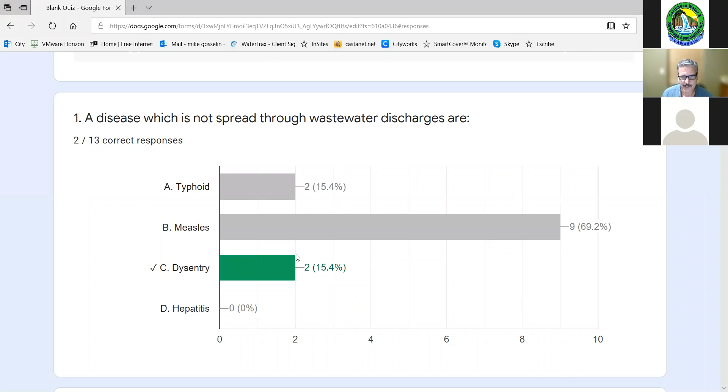Okay. So the first question. This is the one with the typo error, and everybody that picked B, measles, was actually correct. Any comments on that one? And it'd be a little easier for me this morning if you can chime in with your microphones, so I don't have to flip back and forth trying to make sure I didn't miss any chats. So if possible, if you have a question, if you could chime in with your mic, that'd be great. If not, I'll try and flip back and forth.

The second question, everybody got that right. The chemical formula for water. So great job on that one. Number 3, which is not a source of wastewater. And remember, when you do the exams, you gotta watch out for that word not. It does change the whole context of the question. So transpiration is the water movement through a plant. So that's the correct answer.

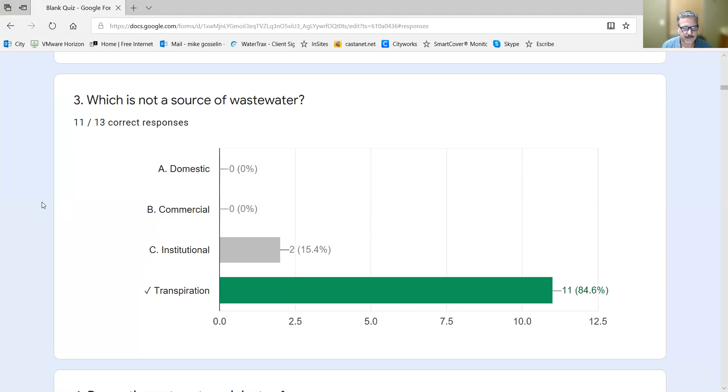Domestic is from a house, commercial is from like a laundry facility or something like that, and institutional is maybe from a correctional institution, but those are all sources of water, and transpiration is not. Like I said, if I'm going to go through and explain some of these, I'm going to need you to chime in if you have any questions or need some more clarification. Okay. Number 4, everybody got that correct, so good job.

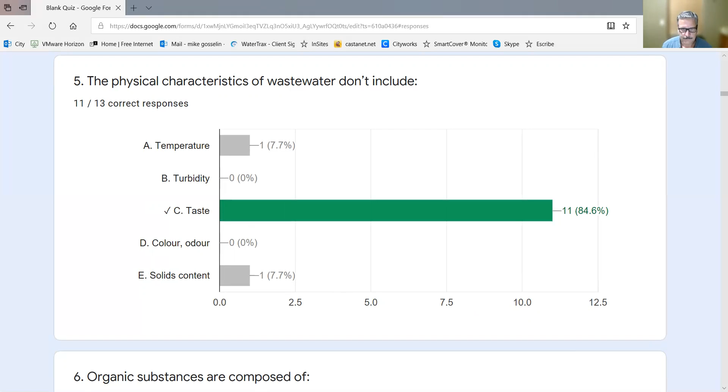Number 5, the physical characteristics of wastewater don't include, the correct answer there is taste. So remember, anything physical, so turbidity, you can see, temperature, you can feel, color, you can see, and solids obviously as well. So taste is something that's not considered a physical characteristic, and you shouldn't be tasting that anyhow. Organic substances are composed of, everybody got that correct, so that's awesome.

Phosphorus is a blank when released to the effluent, so that's a nutrient. So phosphorus and nitrogen are like things that you might add to your garden or your grass if you want it to grow, because it's a nutrient source. Wouldn't be classified as an accelerant. It accelerates what's happening because it is a nutrient, but it's not an accelerant. It's definitely not a retardant.

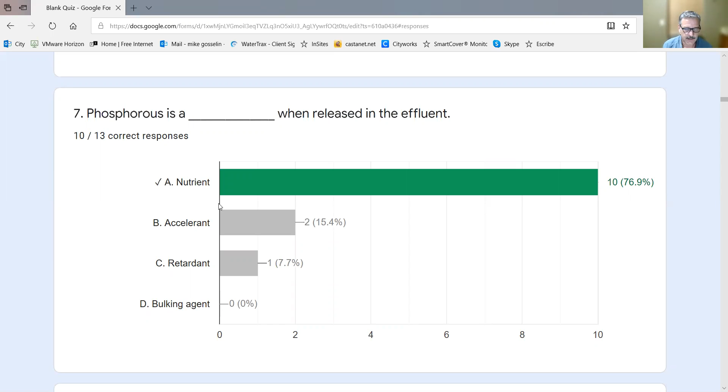So just try and remember that, try and put some of the things in context when you're writing them, or when you're reading them, is like, what else could you use phosphorus for? And like you said, a garden or a lawn, because it's a nutrient. Okay.

Channel 3 meters wide, has flow to a depth of 0.5 meter. What's the daily flow in meters cubed per day through a channel? Velocity is 1 meter per second. So it gives you the calculation there. So its rate of flow is width times depth times velocity. The only other thing that you need to remember is the velocity is 1 meter per second in this question.

So you have to multiply 3 by 0.5 by 1, and then you need to take seconds into a daily flow. So multiply by 60 seconds a minute times 60 minutes an hour times 24 hours in a day. Questions on that one? I'll pause a little longer on some of the math ones. So. Okay.

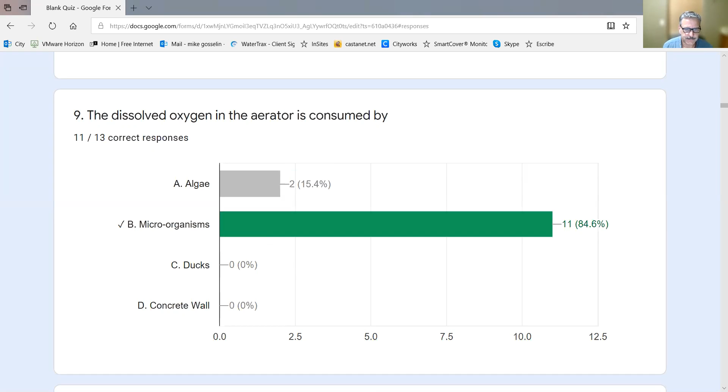Dissolved oxygen in the aerator is consumed by. Now, I could see where a person read this question really quickly, but the majority of people got this 100% correct. So it's microorganisms that need the DO to survive. Algae would consume oxygen, but that's not what the question is asking. So the word aerator, it could have been aeration tank rather than aerator, but it definitely doesn't say anything about lagoons. So algae would not be right in this answer. It had to be microorganisms. 10, the job hazards, everybody got that correct.

I'm going to go through the math on my handy dandy iPhone because we all have calculators. Keep in mind that they won't let you use your iPhone as a calculator in the exam. You're going to need an actual calculator.

So this is a cylindrical tank. So it's 0.785 times diameter squared, 3 times 3, times the height, which is 70.65 cubic meters, and there's 1,000 liters in a cubic meter. So the right answer is 70,686. I come up with 650, but it's 686.

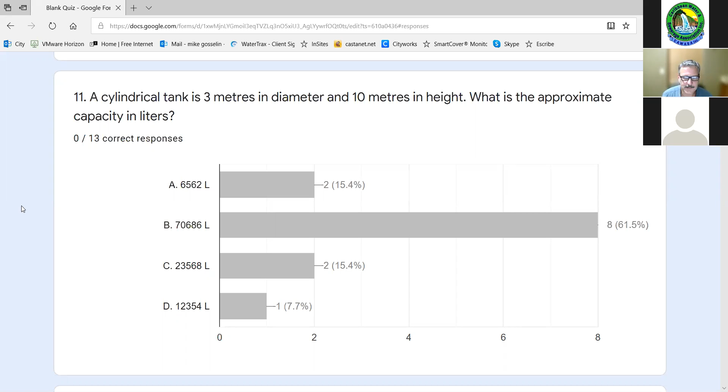pH being acidic, just remember that lower than 7 would be acidic, and higher than 7 is basic. Okay.

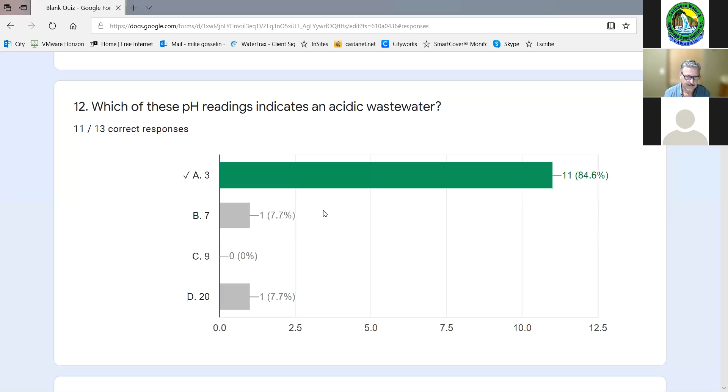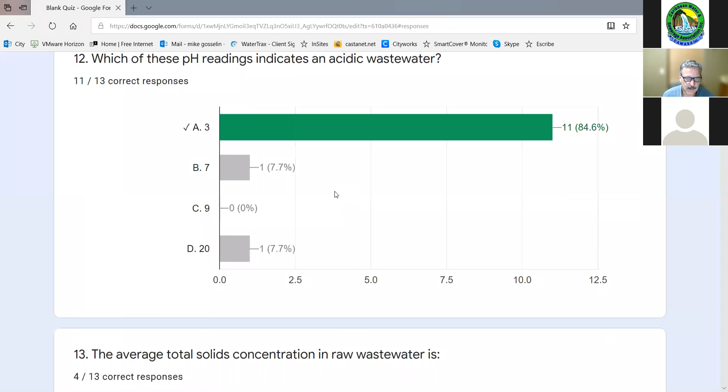These are tough questions. You've got to remember from our... I'm trying to remember off the top of my head. I think it was when we... Sorry, my screen moved there. We talked about the average concentration of wastewater, and 200 is right around the number for raw wastewater. Remember to really read the questions. I'm not quite sure why my screen's moving so much, but really read the question, and it's asking for raw wastewater, not mixed liquor or something like that. So you're going to have to commit that one to memory.

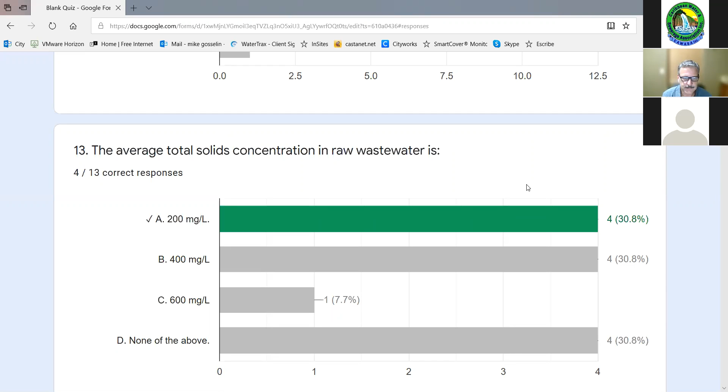Before you go, question. Mm-hmm. When I went back and checked the notes, I don't remember seeing it being 200, because 200 was the suspended solids. If I could pull back the PowerPoint. This is one I had to query, because when I checked the PowerPoints, it said that 450 would have been the total concentration. So for raw sewage, the average total.

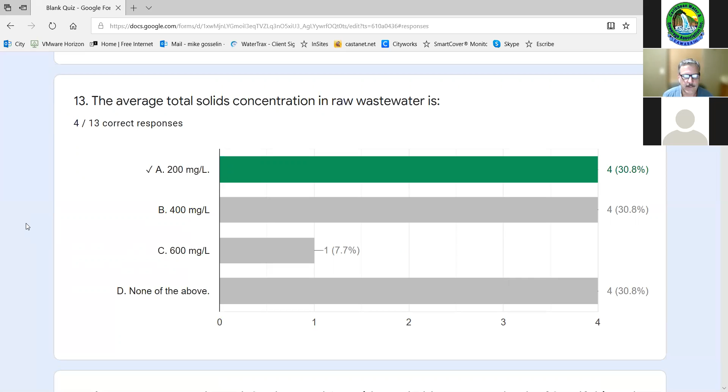I think it's somewhere in the notes, and I don't remember the exact range. It was in a table. I can see if I can pull out the PowerPoint and get back to you. Okay. All right. Well, while you're looking for that, I'm going to carry on. Okay.

Again, don't focus all your time on the math. If you have a problem with a math question or you're curious, just pass it and go back to it in the exam, because there's only a few of those, and it's better to get 90% on the exam and spend less time on the math.

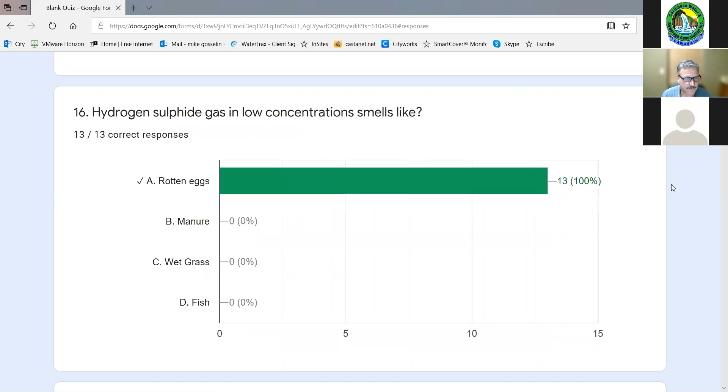16, everybody got that correct. It's awesome. So preliminary treatment, just remember the schematics of our plants. Preliminary treatment is screening, grit removal, comminution; that's everything basically before it's hitting maybe your raw pumps or your primary tank. So that's all classified as preliminary at the beginning of the plant.

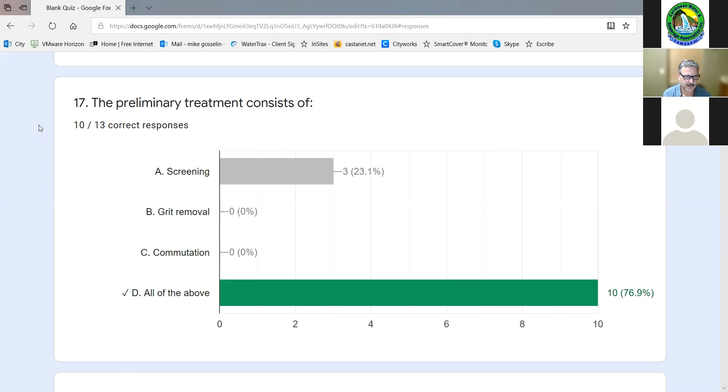Another way you can think about questions like this is, if you're dealing with lift station stuff, what might be outside of a plant, right? Or what's removed from the wastewater flow before it affects the plant. So definitely screenings, grit removal, and comminution would be considered in that.

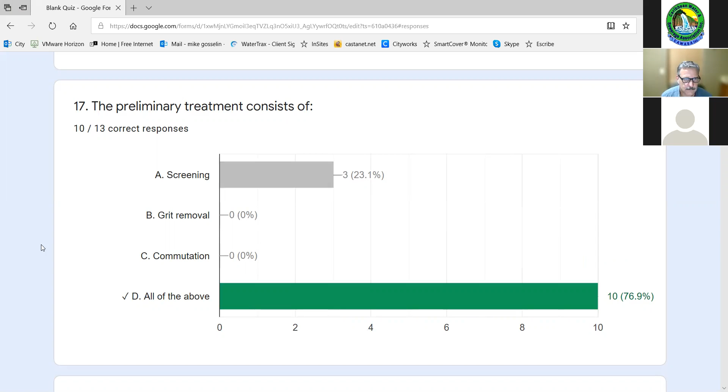Hi, excuse me, Mike. Yeah. All right, I found the PowerPoint slide. It said the solids typically present in a normal medium strength raw wastewater can be broken down like this. So organic suspended is 200, dissolved is 100, which gives you a total of 300. The inorganic suspended would be 50. The inorganic dissolved will be 100, and that total will be 150. So the overall total would have been 450. I remember reading this in the notes, so that's why I said none of the above.

So I don't have the slide in front of me. Can you just read off those numbers again? Okay, 1 second. I'm gonna stand close to the slide. All right. The organic suspended solids were 200. The organic dissolved would be 100, giving a total of 300. And then the inorganic suspended would be 50, and the dissolved would have been 100, giving a total of 150. So 300 and 150 is 450.

So in these types of questions, I totally agree with you. I understand what you're putting on the slide. This question would have probably been better worded if it was organic solids. Questions like this, better off to assume that they're talking about organics rather than total solids, which could include inorganics. That's about the best clarification I can give you. So I totally understand where you're coming from.

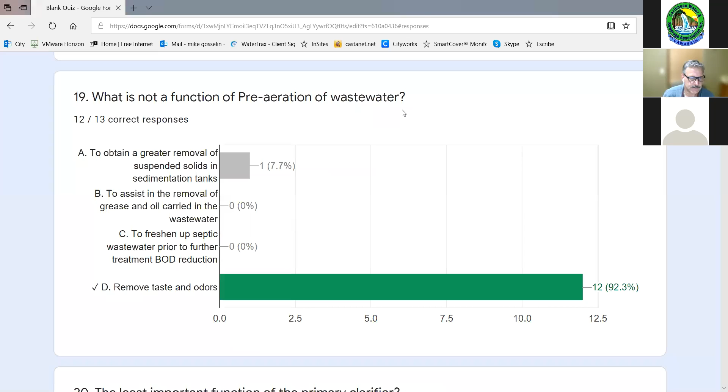Pretty much everybody got this right, which is not a function of a pre-aeration tank. Remove taste and odors is 100% correct. You're going to run across questions like this, and they will be on the exam. I really don't like these questions. You know, what's the least important function of a primary clarifier? But keep the wastewater fresh is not what the primary clarifier is designed for. You're removing sludge off the bottom, scum off the top. Okay.

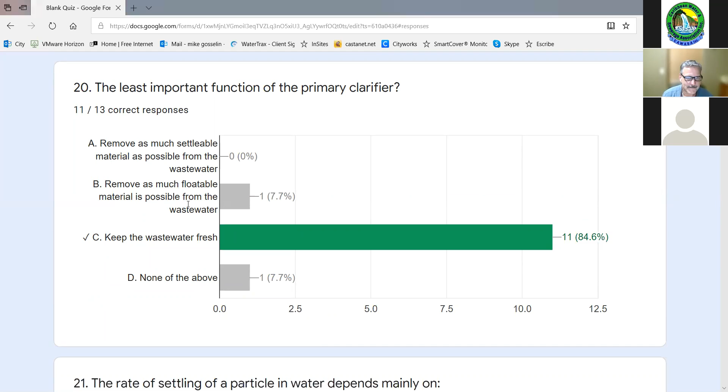The rate of settling of a particulate in water mainly depends on the size and the shape of the particle. I think we covered that quite a bit. Specific gravity, temperature of the wastewater, flow through the tank, all have an impact. But if you remember from our slide, when the question is depends mainly on, and the keyword there is mainly, it's the shape and size of the particle.

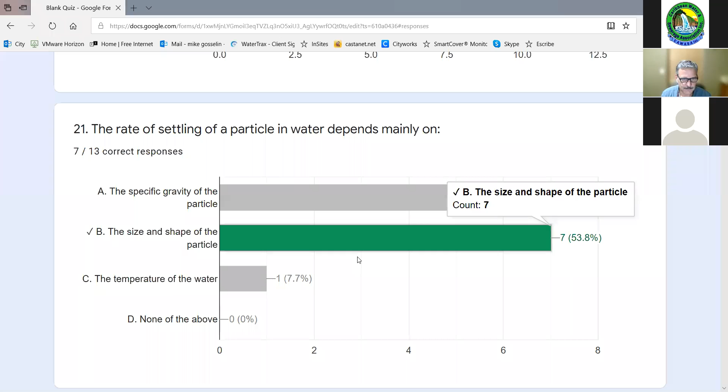Formula expressed for detention time in a vessel: volume divided by the flow rate through the vessel. That's 100% correct. For those that picked answer B, you wouldn't want to flip that calculation around, right? The volume's got to be on top and flow rate on the bottom. Okay. I think we went through some detention time calculations in that PowerPoint as well.

Anaerobic digestion uses two groups of microorganisms, and they're classed as acid formers and methane formers. That's correct. Answer A, types of bacteria. When we talked about digestion, we talked about aerobic and anaerobic digestion, right? Using different temperatures, different bacteria, but it's definitely the acid formers and methane formers for anaerobic digestion. Okay.

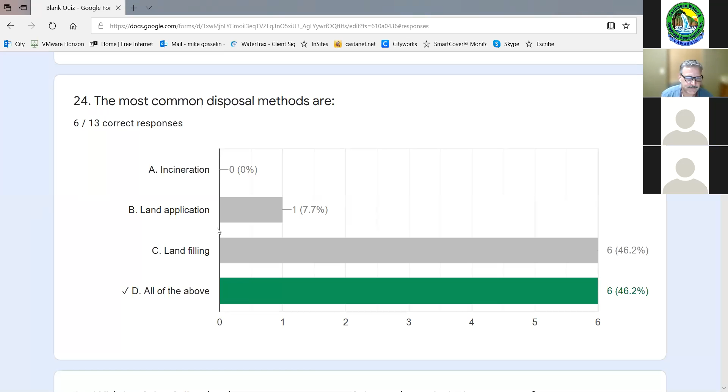Definitely, yeah, I can see where you go. The most common, and you'd be picking landfilling or land application possibly, but they're looking for multiple answers there with methods. It's really good to figure out that kind of part of the question, and how to get closer to your answer. And they're not trick questions, it's just the way they're worded.

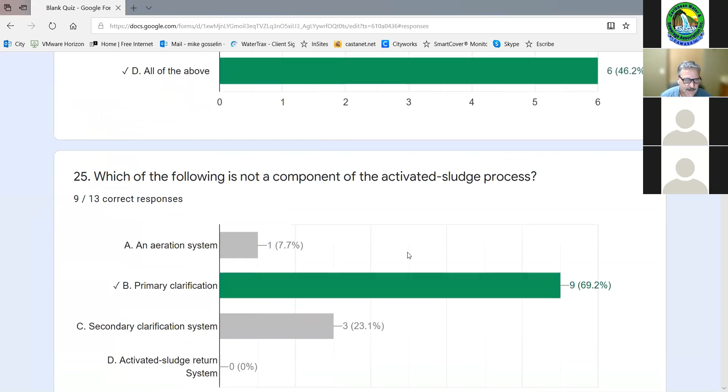Which of the following is not a component of activated sludge. Most everybody got that correct. For those that didn't, just remember that when we break down our systems and the schematics that were shown, you have your preliminary treatment, then your primary treatment, your secondary treatment. And in secondary treatment, you've got aeration system, secondary clarifiers, and the return system is part of that secondary clarification system. So the only answer you're left with is primary.

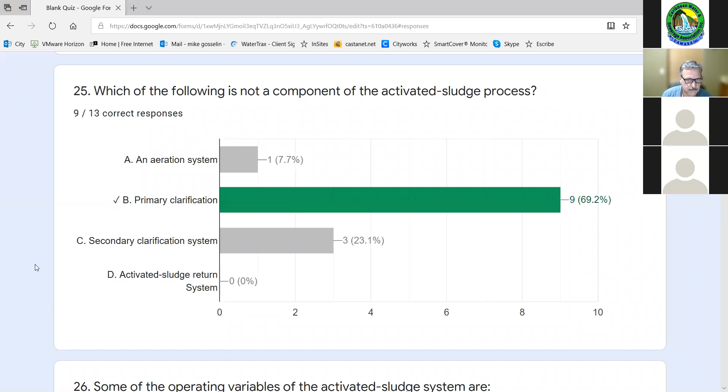Some of the operating variables of an activated sludge system, most everybody got that right. Again, if you look at the question of variables, it's looking for multiples. Aeration time, dissolved oxygen, and F to M ratio are definitely part of that activated sludge system. So again, when you do the exam, slow down, really try and figure out the questions and what they're looking for, okay?

So I'm pretty sure we covered mixed liquor suspended solids, and the math part of that. Again, if you got some questions, go through that math section. The majority of people got this correct, so that's really good. For those that didn't, if math is not your strong point, I know I sound like a broken record sometimes, but just skip this question and come back to it. Better to spend your time on questions that you're more comfortable with.

And I'm not telling everyone to guess the answers, but if you're nearing the end of the exam and you don't have all your answers filled in, better off to pick a guess on a question like this rather than leave it blank, because blank is wrong. If you had to guess, at least you got a 25% chance of hitting the mark. And there are a lot of people that took this mock exam that only missed the 70% mark by a few answers. So just go through the math PowerPoints, and like 2 or 3 answers, and you'll be exactly where you need to be.

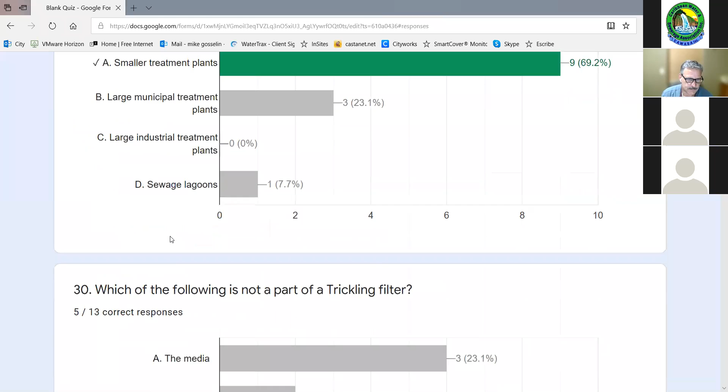Which of the following is not a part of the trickling filter? The filtration system, that's correct. So this is not part of a trickling filter. It has media for the biofilm to grow on. It's got the under drain system, which supports the media and allows flow through, and the distribution system. If you remember from our pictures, that round arm that distributed the flow. So those are all parts. And this is what's not part of a trickling filter.

Okay, I'm just going back and forth. I try and remember to flip back to the chat and take a look.

So the rate of flow of a trickling filter distributor arm is controlled by flow regulator, baffled tank, gate valves. I'm not even sure we talked about this exactly. I can't remember, it's been a few months now, but C is the right answer there. Baffled tank, definitely not. Flow regulator, I could see why people would pick that.

But if you're not sure, take that text and put it into Google, and it'll do a search on that, and it'll show you exactly what that is. And gate valves, they can be used to control flow, but that's not what the question is asking. Sorry.

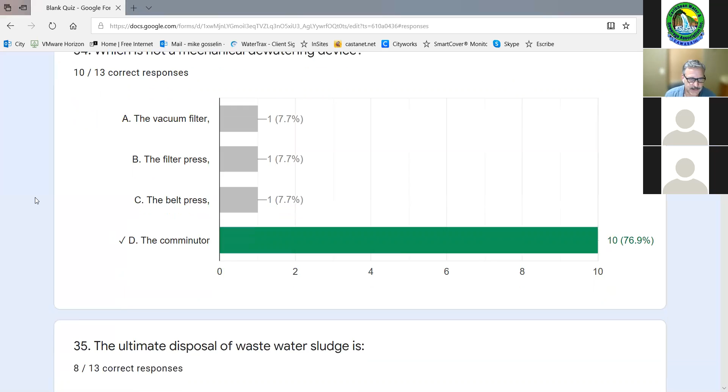Very similar to that last question we were talking about. The ultimate disposal of wastewater sludge is, you can put it on land, you can incinerate it, you can sell it as fertilizer, or at the landfill. So the correct answer is all of the above. For those that didn't get this right, if you retook it after we talked about it, you'd probably get the previous question right, and you'd probably get this one right as well.

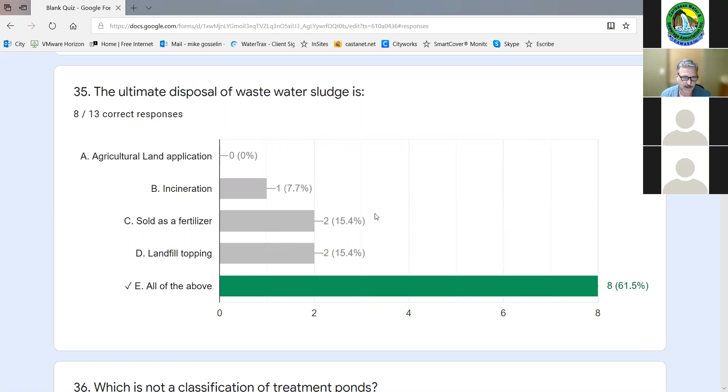Which is not a classification of a treatment pond? Anoxic is the right answer there. Anoxic is where we're not adding air to a zone, but anoxic is usually a zone created through manipulation of flow or air in a tank. A lagoon is obviously a treatment pond. Aerobic ponds, anaerobic ponds, facultative ponds, we talked quite a bit about those. So again, anoxic is not a classification of a treatment pond.

Chlorine is not applied... several of these questions have "not." Chlorine is not applied to wastewater systems to control taste is the correct answer there. Now, this rodent answer, I doubt you'd see this on the exam, but you wouldn't necessarily be adding chlorine to kill rats or other rodents, but the correct answer they're looking for is taste there.

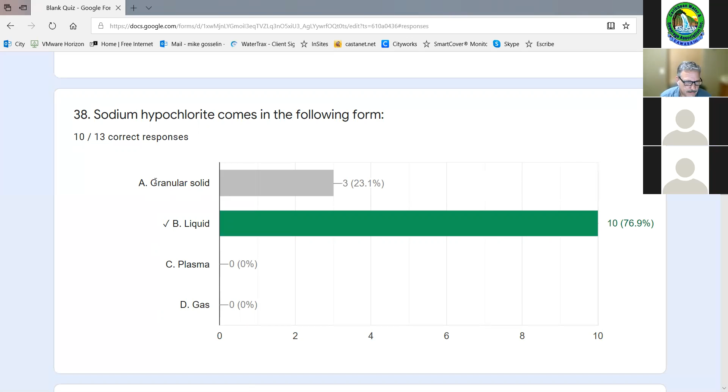Sodium hypochlorite. Sodium hypochlorite is definitely in a liquid form. Different chlorine comes in different, you can get or make chlorine from different things, but sodium hypochlorite typically at 12 to 12.5% is in liquid form.

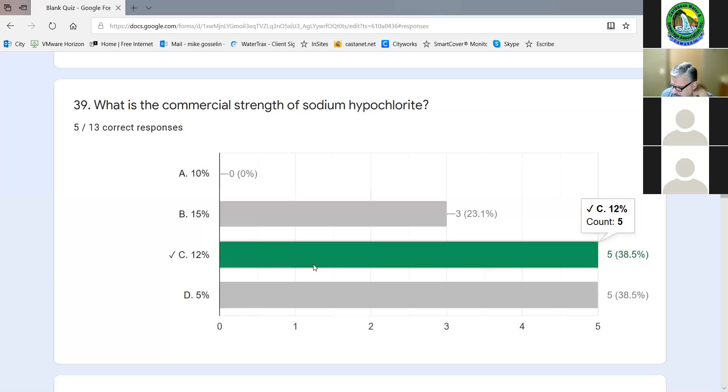Oh, there's the next question. Notes the commercial strength of sodium hypochlorite is 12%, 12.5, something like that. Okay. Yeah, you want to commit that one to memory because I bet you that one will be on the exam for sure, or something really close to it.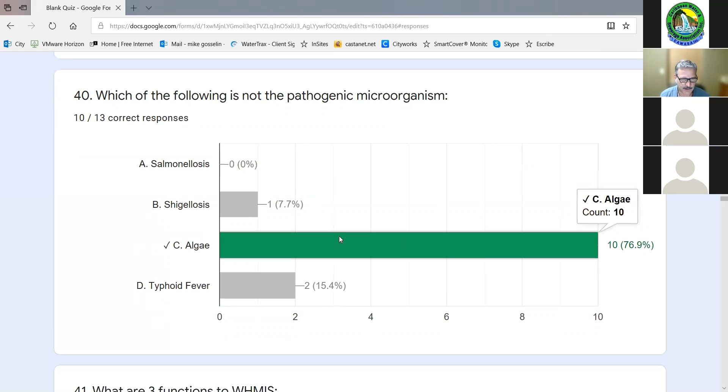Yeah, algae is the correct answer there. Not a pathogenic organism. So algae is present in all types of systems. It even grows in the corner of your aeration tanks, depending on the flow. It's on lakes and streams. It's a natural occurring event, and it's not a pathogenic microorganism.

Three main functions of WHMIS: training, labeling, MSDS. This or something very similar will be on your exam, and that's, people have to be trained. You have to label the bottles or the containers and the MSDS sheets. So commit that one to memory too.

For B, regulation is what would drive a WHMIS program and would make you train people, would make you label and use supplied MSDS sheets. Okay, it's not a hazard.

Mike, can you go back to question 39, the one about the bleach that we should commit to memory? The 12%, 15%. Yeah, we don't really deal with chlorine, so we were just wondering why the different percentage, and then why isn't it 15 as well? Why the answers are there? No, like the different. Could you just explain it a bit more? Because we don't really deal with chlorine, so we just want a better explanation. Oh, okay.

Yeah. So 12 to 12.5% is if you ordered hypochlorite. Sometimes we deal in smaller totes. Sometimes we have 1,000 liter totes that we get it in. It's just supplied at 12 to 12.5%. It's direct from the manufacturer. Hypochlorite is something that's not mixed. You can't increase the concentration or decrease the concentration. Hypochlorite is just a liquid form of bleach chlorine, and the commercial strength is 12 to 12.5%.

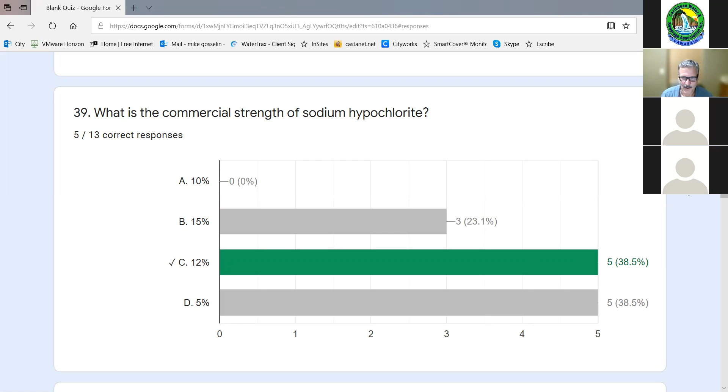You know, I've got some of my staff that have been in my plant for 20, 25 years, never seen a lagoon, wouldn't have anything to do with it. Maybe never even seen a digester. We're building digesters in the next 5 years or something, and it's going to be a whole new learning curve for them.

So it's interesting when we do the tests, because they have to test on a wide breadth of things. So you can take your certificate and move to a plant that has chlorine or doesn't have chlorine or has digesters. So there's a lot of information that gets covered. For things that you deal with every day, the answers are probably pretty easy, and then there's other things that are more of a head scratcher and you have to think about.

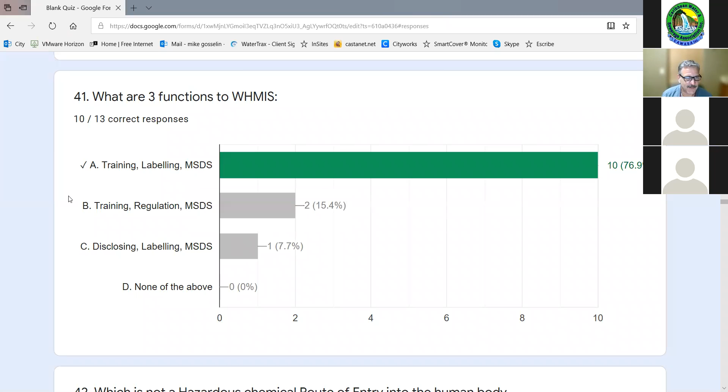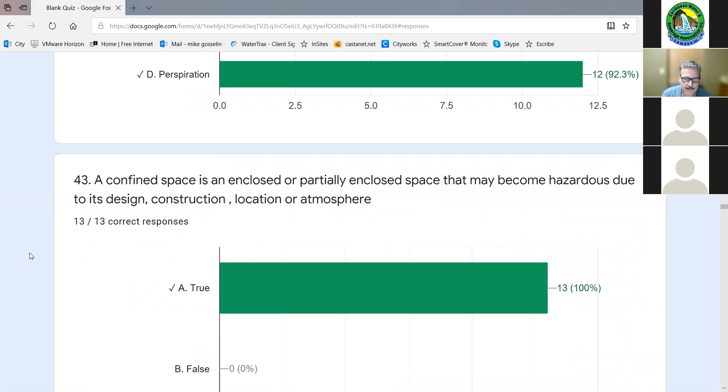So which is not a hazardous chemical route? Pretty much everybody got that right. Just remember, the question is into the human body, and perspiration is going out. Okay. 43, everybody got that right. So that's awesome.

44, which test best measures the efficiency of trickling filter? BOD is the right answer. So efficiency for trickling filter or any other process, you'd basically be doing some kind of calculation about what's coming in and what's going out.

So the sludge pH is just how the water is, what the condition of it is. Sludge age is how long you're keeping things around, and the temperature is again just a condition of where you're at. So to measure the efficiency, majority of people got that right, you would be looking at the BOD coming in, the BOD going out. So good answer.

Comfort is the primary intent of HVAC systems, and to promote... The right answer is all of the above. The only one that, if I wasn't sure about this question and was going through it, I wouldn't consider initially is productivity. So I'd take that off my list, but I'd be looking at health, and definitely HVAC systems could have an impact on the building itself. So then I'm faced with two answers, and I would default to all of the above. And the majority of people got that right.

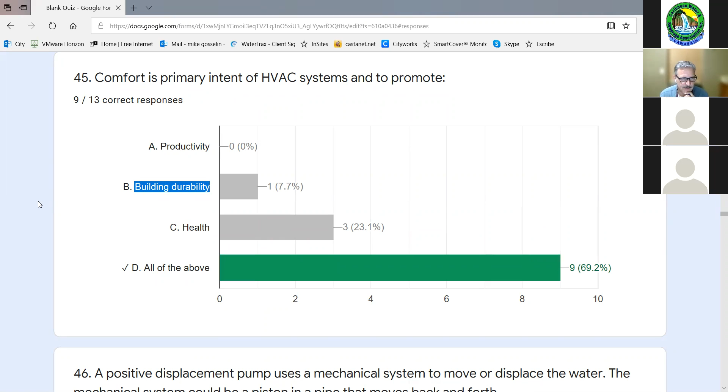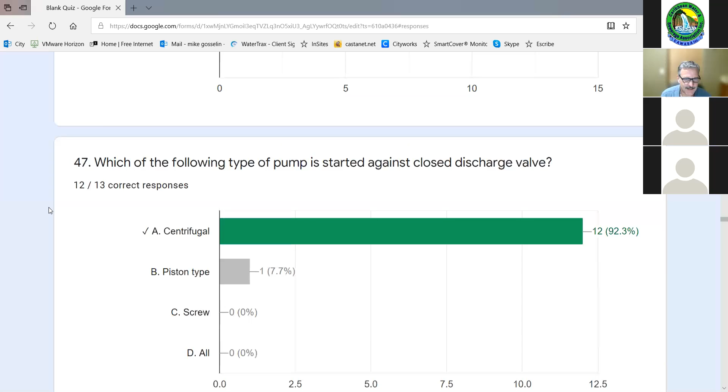Positive displacement pumps. Yay, everybody got that correct. Which of the following types of pump is started against a closed discharge valve? Now, the question is worded a little strangely. Centrifugal pump, definitely the answer there. A piston pump is a positive displacement pump, so you would not start that against a closed discharge valve. You're going to blow something apart. The question probably would have been better worded as which of the following types of pump can be started against a closed discharge valve, and that would have pointed you right towards the centrifugal pump. You don't have to start a centrifugal pump with the discharge valve closed, as the question kind of alludes to.

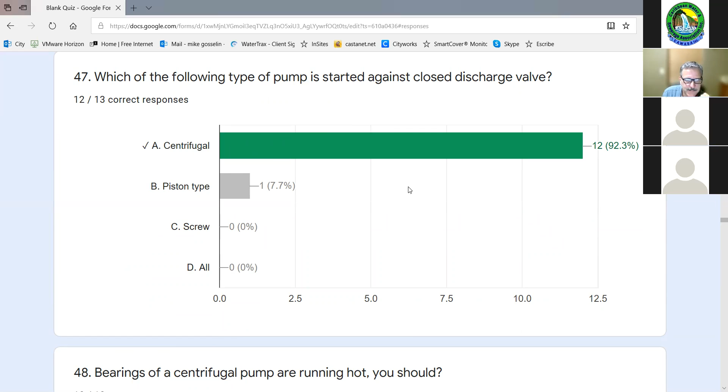Bearings on a centrifugal pump are running hot. You should check lubrication. You bet. Replacement of the bearings would come after the initial inspection. So you check the lubrication, make sure things are greased properly. If there was still an issue, then you'd be looking at doing the mechanical replacement of the bearings. But the initial step would be to check the lubrication.

As well, think of some of these questions in terms of your job as an operator. I know in some locations, especially in smaller plants, an operator is kind of a jack of all trades, so they do a lot of things, including maintenance. A lot of plants, though, don't do as much maintenance. They would definitely do lubrication and check bearings and seals, but the majority of the time they wouldn't replace the bearing. You'd have somebody else do that. So you can think of it two different ways there.

The problem of cavitation in centrifugal pumps is usually due to high suction lift. I'm glad that nobody picked C and D, so that's awesome. So, high suction head and high suction lift. Head is on the discharge of the pump and suction lift is on the suction side. If you have a high suction lift, it's going to require more to get water into that pump, and if it's too much, you're going to be starving that centrifugal pump, which is then spinning and causing that cavitation.

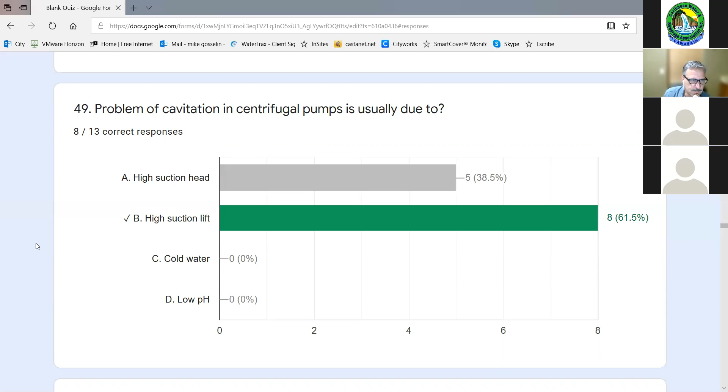Packing gland. So yeah, you're providing a bit of a seal there for sure. The packing gland does not hold the shaft at all. If you remember, the packing glands are the pieces of packing put in, providing the seal there, allowing drops of water to flow through, so you have some cooling. But the main role is to provide the seal. It would not hold the shaft. That's not what they're designed for. That's what your bearings and supports do.

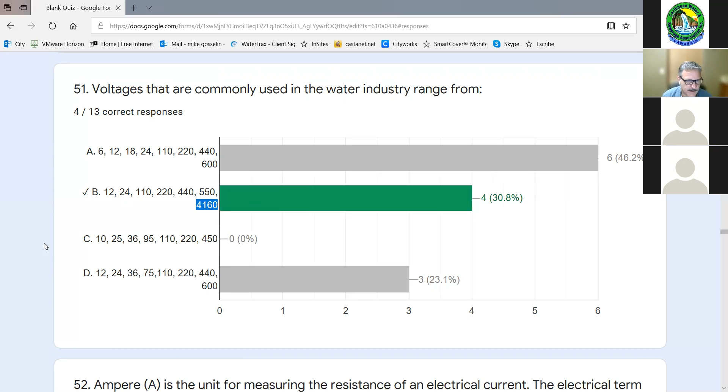And we'll go through this last question, and then we're going to take just a quick 5-minute break. Amp is the unit of measuring resistance to electrical current. The electrical term is called amperage, and that is... Sorry, I'm just reading this question again. Okay, and that's false. Most people got that correct. Any questions on that one? That's not a very well worded question, for sure, but the majority of the people got that right.

Before we take a quick break so I can top up my water and stuff, my throat's getting a little dry. Any questions so far? Like, how did people feel taking an exam? Were you comfortable? Did you feel a high level of stress? I'm just really kind of curious. Anybody want to comment and tell me what their thoughts are?

Yes, I was relatively comfortable. It didn't seem very hard to me. It's just that, like I said, because I wasn't attending most of the classes, I struggled a bit. But to me personally, the questions were not hard. Even the maths, I got most of the math questions correct. But it's just because of my lack of attendance. Yeah, and like you said, we talked about that, that's understandable. You've got a lot of things going on, for sure. Anybody else want to chime in on what they thought about the exam so far?

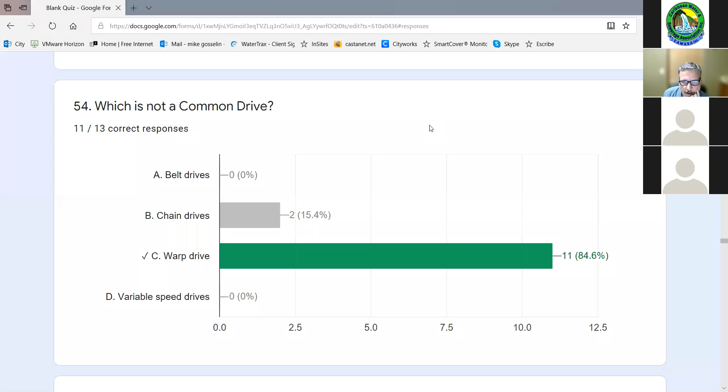So question 54, which is not a common drive? Warp drive. For all the Star Trek fans, you must have got that right. Belt, chain, and VFD drives are all common drives. So warp drive is definitely not a common drive. Corrosion is caused by the reaction between metallic pipe and its surroundings. It's true.

For those that didn't get that right, just take a quick review of the cathodic protection section that we talked about.

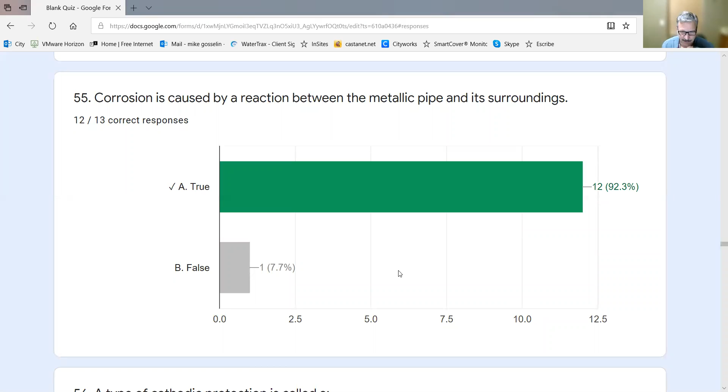And thank you everyone for taking a quick break, because it's 6 o'clock in the morning here and I needed my coffee. So I appreciate that.

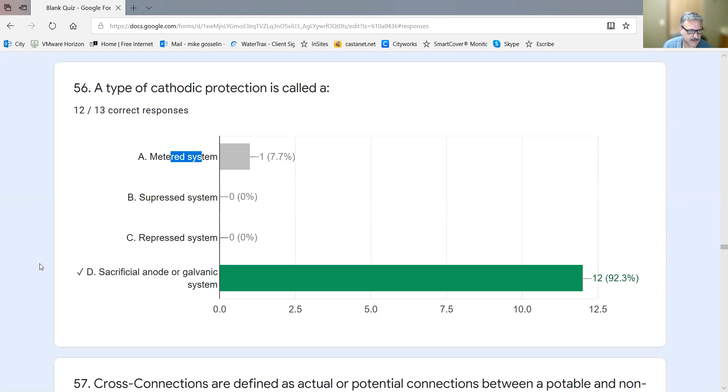Type of cathodic protection is called, we talked about cathodic protection quite a bit, sacrificial anode and galvanic systems. They are metered, but they're not classified as a metered system. You meter the voltage that you're sending out there, but this is asking for the type of system. So D is the right answer there, which the majority of people got. Cross connection is defined as an actual or potential connection between potable and non-potable supply. That's true, and the majority of people got that correct as well.

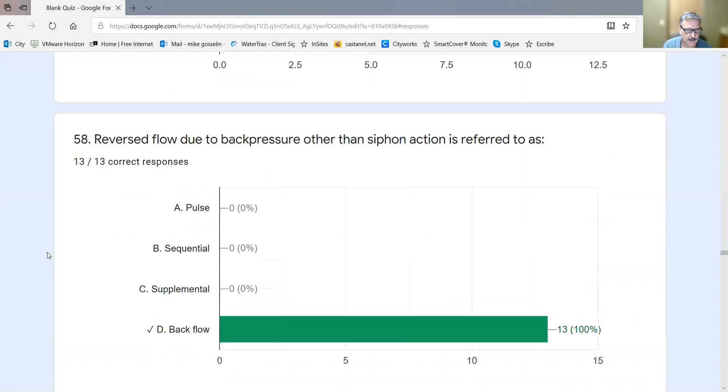Reverse flow due to back pressure, 100% correct. Good answers. Which of the following is not a backflow preventer? Gate valve is the right answer there. The air gap, definitely that's the physical separation. So that is considered a backflow preventer, because you actually have a physical gap. So just think about that.

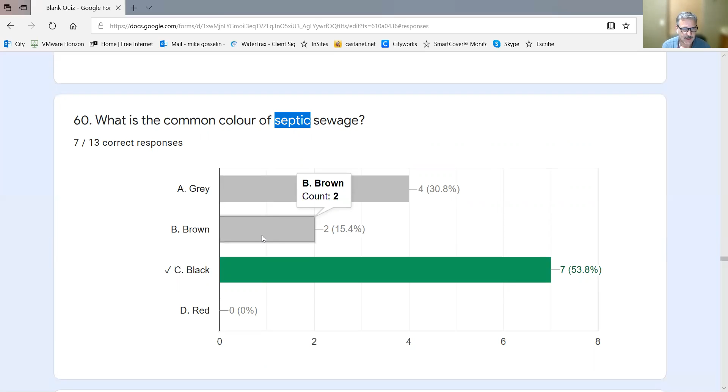What's the common color of septic sewage? Keyword there is septic. So if it's gone septic, it's black. You've got rising bubbles, all kinds of stuff going on there. So black is the right answer. Gray would be the common color of normal domestic sewage coming into your plant. Brown would be more the color of things in the aeration tank, but it's asking for the common color of septic sewage. Okay. And that leads right into this question. What's the common color of aerated mixed liquor? It'd be brown. And we talked about the gray and black already.

Just have to bring up my chat box. It keeps disappearing. There we go.

Which of the following is an inorganic substance? Silicone is the right answer there. Plastic cups are inorganic, but it's more of a thing, not a substance. That's the only way to explain that one.

Not all wastewater contains solid material. Not quite sure how to explain that any more than, you know, solid material is solids, right? Or in this question, I guess it could be something that's actually physically solid, but not the best worded question. And you're going to run across questions in your exams that are not worded the best either, but the majority of the people did get this correct. So good answers.

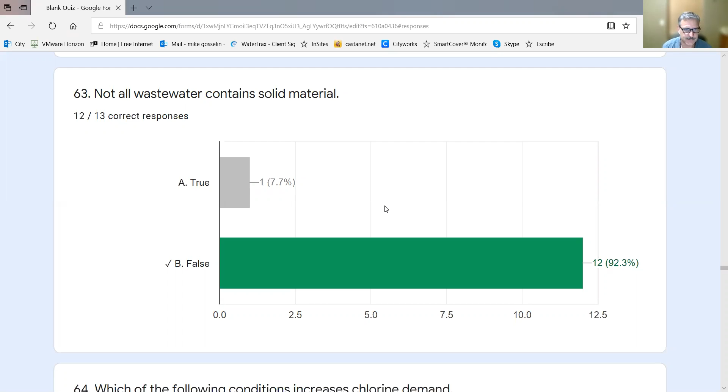Increased chlorine demand. Organic matter, most definitely. pH and alkalinity do have an effect on chlorine and chlorine's effectiveness, but increased chlorine demand is your organic matter, your BOD load, that type of thing, BOD, COD loading. So C, organic matter, is the right answer there, which the majority of people got correct.

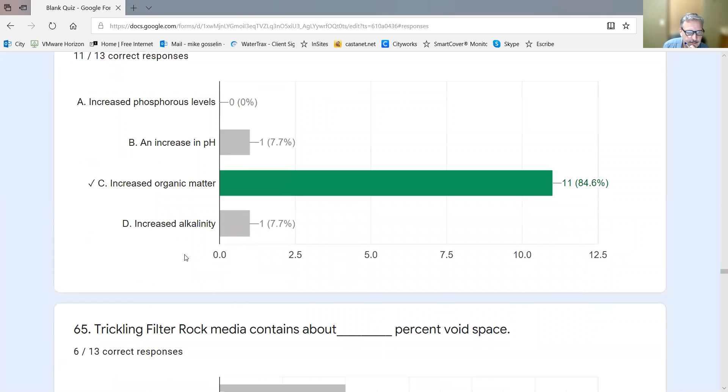Trickling filter, about 35% void space. That's correct. If you're working yourself through this question, for the people that picked C and D, 40% void space and 60% are quite a bit of space. So if I didn't know the answer and I was trying to figure it out, I'd take C and D off the list right away, because that's a lot. So then I'd be struggling between A and B. I'm quite sure we talked about it in our PowerPoint somewhere, but 35% would be approximately where you need to be.

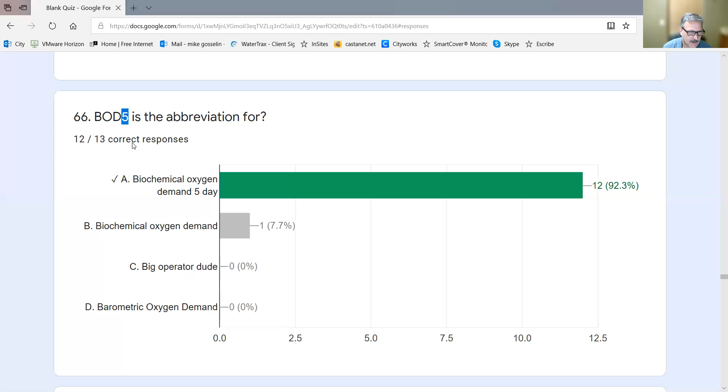BOD. Yeah, so we'll talk about this one just briefly. For those that answered B, BOD is biochemical oxygen demand. But when you see BOD 5, that's the 5-day test. So BOD on its own would be if you're testing in your plant your removal efficiency or something to do in your facility. But BOD 5 is what they do in the lab with the 5-day test. So for those that got that correct, good for picking up on that. For the person that picked B, just remember when you see 5, BOD 5 is the 5-day test. Okay.

This process is a biological method of wastewater treatment performed by a variable, mixed community of organisms in an aerobic aquatic environment. You're going to see questions similar to this. They're really long worded. So if you have to work through it, you just have to pick them all apart. So it's biological, a variable, mixed community of organisms, and aerobic and aquatic. So you have air and it's water, you got different microorganisms in there, and that's explaining activated sludge. Okay.

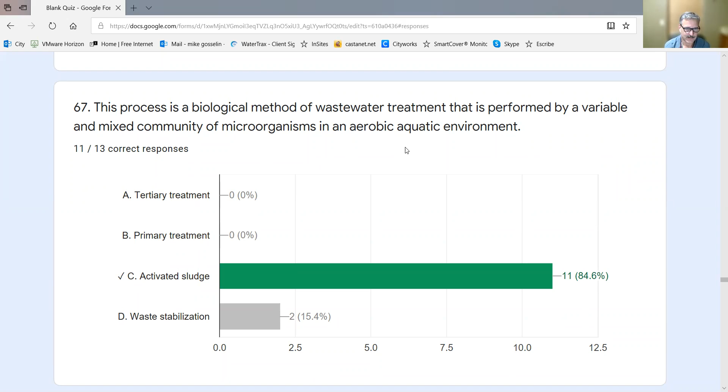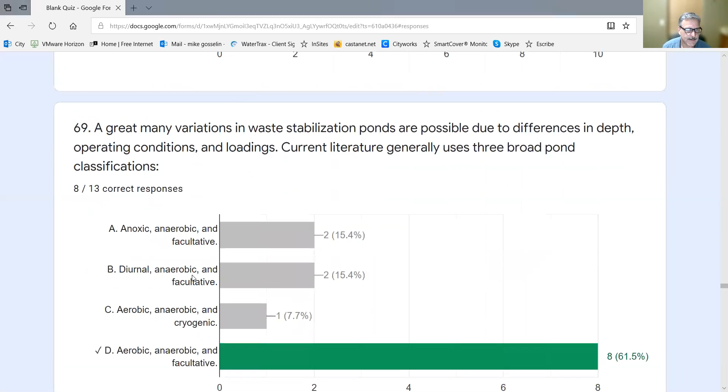A great many variations in waste stabilization ponds are possible due to differences in depth, operating conditions, loadings. Current literature generally uses 3 broad pond classifications. We talked about ponds quite a bit, and D is the right answer there. C, definitely cryogenic, that'd be no. B, diurnal is the wrong answer there, and that's diurnal flow to possibly your plant. And then A, the wrong part there is anoxic. So we don't classify ponds by anoxic at all. Those are just zones that you would create. So the correct answer is D.

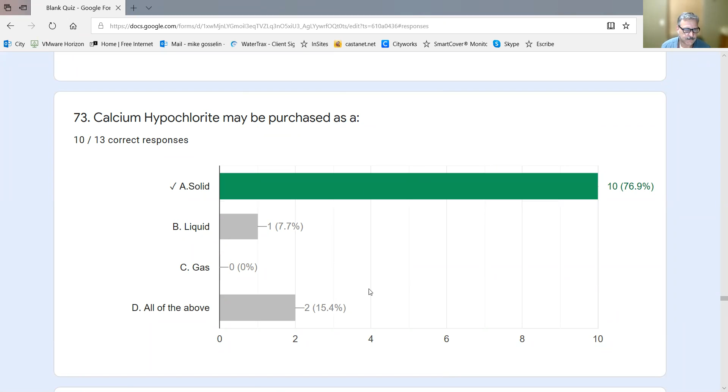Hypochlorous acid is the more active component in the disinfection process that uses chlorine. That's true. Calcium hypochlorite may be purchased as a solid. That's true. So sodium hypochlorite is the liquid, calcium hypochlorite is the solid. Okay. Chemical formula for hypochlorous acid is HOCl. The majority of people got that right.

UV light disinfects by inactivation. We talked quite a bit about UV disinfection, and it penetrates the cell membrane. It doesn't allow the microorganisms to reproduce, so they've been inactivated or sterilized, and then they die off on their normal cycle.

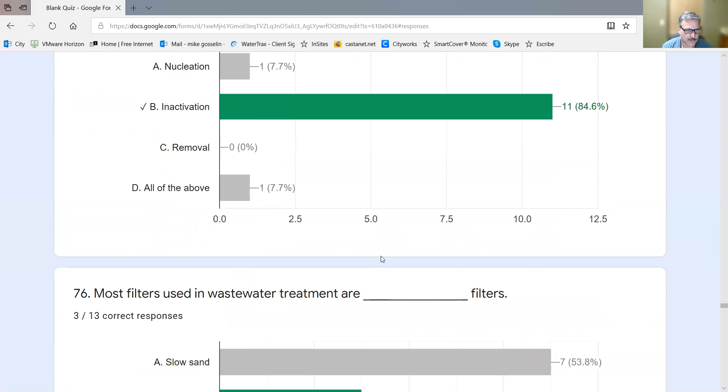Most filters used in treatment are blank filters, and rapid sand filters is correct there. They classify rapid sand filters because of the amount of flow going through, so it wouldn't be a slow sand filter. Pressure sand filter, definitely not, and earth is not what most wastewater plants would use to filter their water. Okay, so just remember it would be classified as a rapid sand filter. Okay.

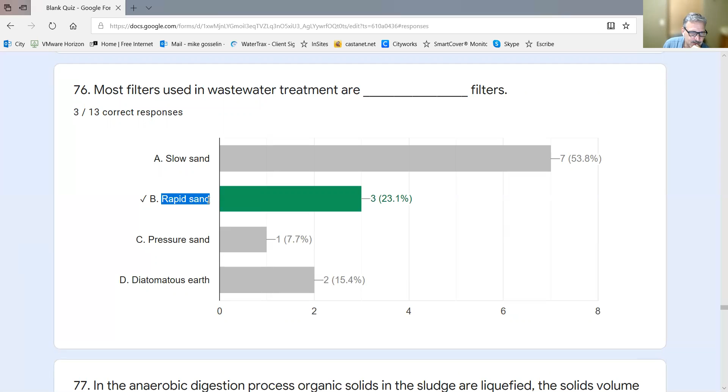77, everybody got that correct? One second, can you repeat that for me? My net dropped at that time. You said it's rapid sand because of the flow? That's correct. That's okay. If you're going to look at it, it'd be classified as a rapid sand filter, right?

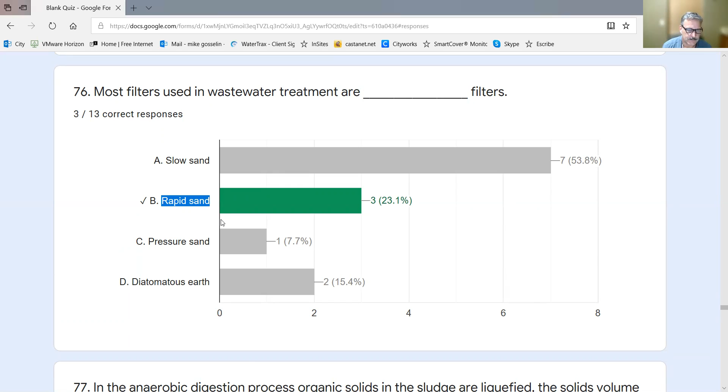So I'm not sure if anybody deals with filters or not, but the majority of sand filters are some kind of dual media, so you've got anthracite and sand. The footprint for sand filters is not all that large in comparison to the treatment plant itself. So the flow going through there would classify that as a rapid sand filter rather than a slow sand filter. 77, everybody got that correct, so that's awesome.

78, anaerobic digestion normally operates at 35 degrees Celsius. Good answer. You get into higher temperatures, you're into thermophilic. I think we talked about digestion, the three different types of digesters, which are classified by temperature settings. I'm pretty sure I mentioned that. Commit mesophilic digestion to memory, because the majority of digesters you're going to run across are mesophilic digestion at about 35 degrees Celsius. Okay.

The phosphate removal process, the basin in which the lime slurry is blended with the wastewater as rapidly as possible with the use of a high-speed mixer is called. I can see. I'm pausing for a second because I'm trying to think about explaining this. Even when I checked the notes, I'm pretty sure it's called flash mix. I don't know if I looked at the wrong thing, but I saw flash mixer. I'm just trying to think of the best way of explaining this.

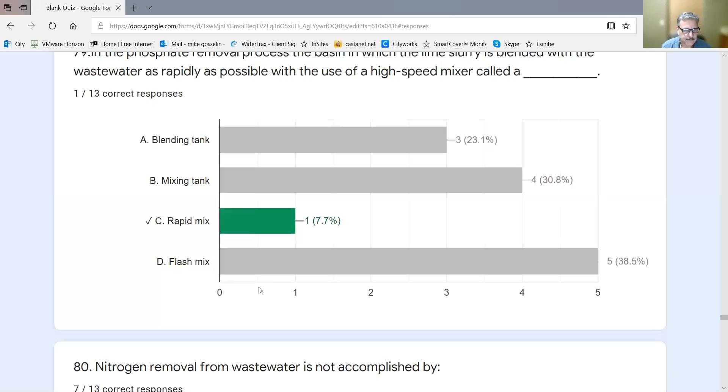Sorry. Okay, question. So the high speed mixer is called a flash mixer, but the process is called a rapid mix. That's what it is. Yes. Okay, because I pulled back up the PowerPoint, and in the PowerPoint it has a high speed mixer called a flash mixer. So that's why I think a lot of people chose flash. Okay. Yeah, fair enough. And I'm very glad that you guys are keeping the PowerPoints around and referring to them.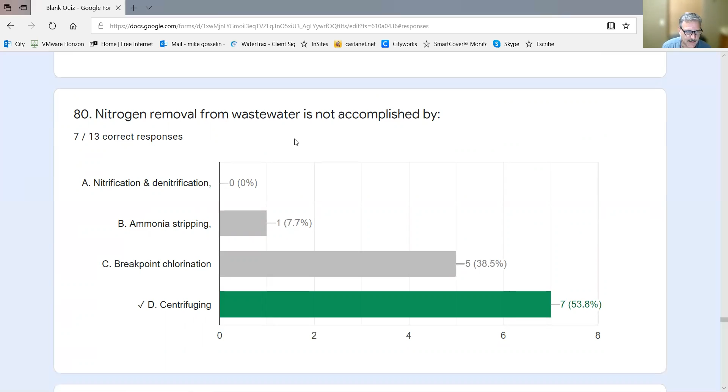So, nitrogen removal from wastewater is not accomplished by centrifuging. That's correct. Okay. Centrifuging is your dewatering process. If you wanted to step back from that, centrifuging would help you remove phosphorus, maybe, because the microorganisms have absorbed phosphorus, and then you're removing it from your system as well as balancing your solids. But it definitely does not have anything to do with nitrogen removal.

Biological denitrification is a process by which microorganisms reduce nitrate to nitrogen gas, then release it to the atmosphere, and that is correct. That's the basis of the type of facility we have in Kelowna. It's a BNR facility, biological nutrient removal, and it's ammonia to nitrate to nitrogen gas.

So mechanical dewatering systems use some type of mechanical device to separate the liquid and the solid fractions of the sludge. The most mechanical dewatering devices are, yeah, so this is very similar to the question that we had earlier. Centrifuges, belt filter presses, and filter presses are all commonly used. I did mention my preference, which was centrifuges, but all three of those are common.

Treated effluent cannot be released to river water, and that's false. It can, depending on your effluent stream and your requirements for effluent disposal, but it can.

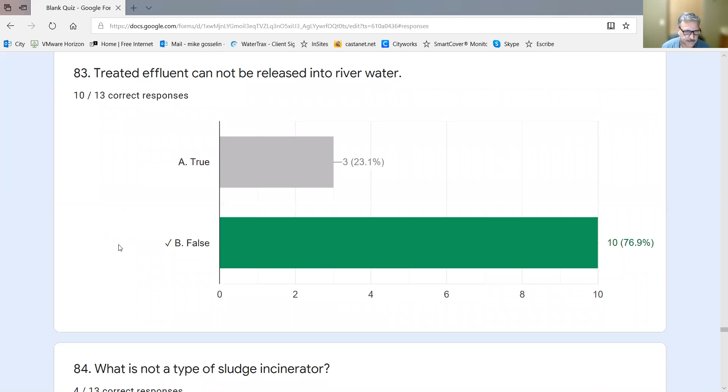So we touched on sludge incinerators. I'm going to take a guess that hopefully you won't see very many questions on your exam on incinerators. You might see a few, but it's good to have a few questions in this mock exam, just so you're thinking about it. And we did cover it in the PowerPoints. So multiple hearth and fluidized bed incinerators are ones that you typically see questions on the exam. Not so much the electric incinerators.

Fire tube boiler is a boiler. For those that aren't aware, basically you have a tank, usually a cylinder in shape. You've got tubes that run from one end to the other. There's water on the outside of those tubes, and whether it's methane gas or natural gas, it's actually fire or gas that's ignited flowing through those tubes, and that's why they call it a fire tube boiler. So you're burning natural or methane gas through those tubes, heating up the tube, which then heats up the water on the outside. Now, we didn't talk about boilers because this isn't a power engineering course, but that's what a fire tube boiler is.

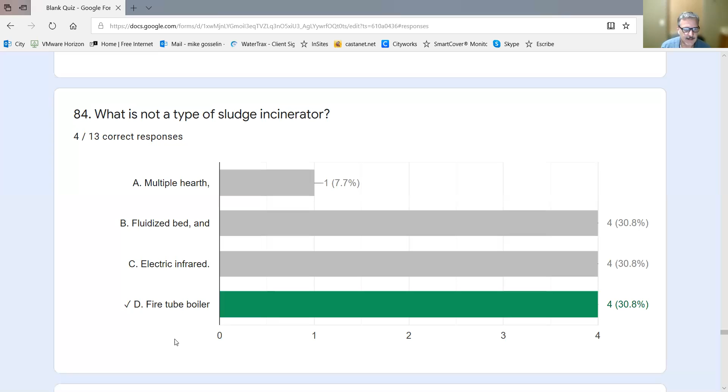Activated sludge aerator dissolved oxygen should be between, typical answer you're going to see is between 1 and 2 milligrams per liter. That depends on the placement in the aeration tank. And also, I know that sometimes operators struggle with this question because different facilities use different DO concentrations. Different facilities have different processes, so what you're used to might be different, but typically in an aeration tank, it's between 1 and 2.

Anything less than 1, you're not providing enough oxygen for the microorganisms. And anything over 2, then you're providing too much air, which could be dispersing your floc. It might cause lysing or some other kind of issues. So the correct answer there is B, between 1 and 2.

The majority got this one correct, which is awesome. So the blank provides a direct measured amount of food available for use by microorganisms. So that's food to microorganism ratio. The question itself gives you an F to M, it's talking food and microorganisms. So it's an F to M ratio. So for anybody that didn't get that correct, just make sure you understand, not the calculation, but exactly what an F to M ratio is.

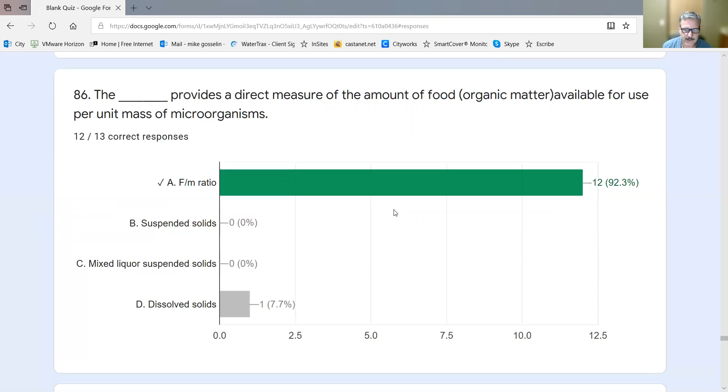The SVI provides a measure of how well the sludge settles in the secondary clarifier. It is defined as volume occupied by mixed liquor suspended solids after 30 minutes of settling, and that's true. So a really long-winded question to say the SVI is a 30-minute settling test, but congratulations to the majority of people that figured that out.

88, if sludge solids are not to accumulate in the secondary clarifier, they must be removed at an average rate blank to which they were applied. I just want to make sure I explain this properly. If you don't want them to build up in your secondary clarifier, you have to remove them at the same rate at which they're coming into the clarifier.

Lesser would allow the solids to build up in the clarifier. Greater would definitely not allow for a buildup of solids, but you're also then returning a lot of water from your secondary clarifier that you don't have to. So the correct answer there, which the majority of people got, is equal.

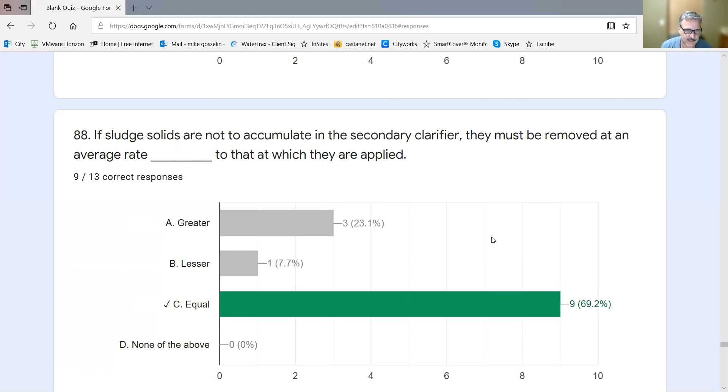Sludge age is defined as the total mass of solids in the system divided by the mass of solids entering the system each day. So any comments on that one? We had a lot of people pick true. We had a few people pick false.

No comments? Well, me personally, I just guessed that one because I didn't know. Hey, well, that's okay. At least you answered it.

So sludge age, think about it this way. In previous questions in the exam, you're talking about sludge age calculated in days. So your sludge age is 8 days, 12 days, 14 days. So it's not by entering each day, it's how long solids are maintained in the system, not on a day-to-day basis. So the answer is false.

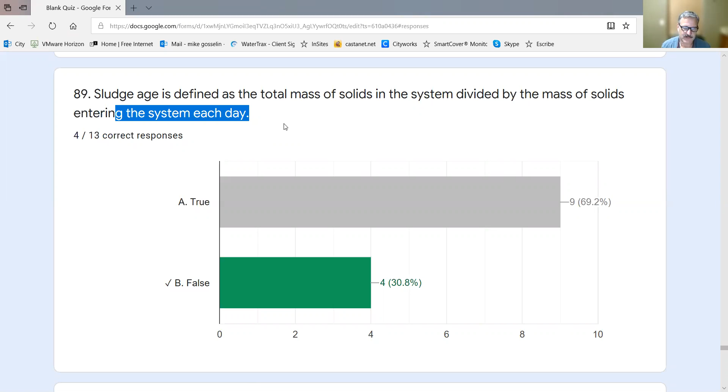Determination of dissolved oxygen concentration in mixed liquor or final effluent should be carried out blank during peak load periods: once a day. That's correct. So once a week would definitely not be enough. Twice a day, if you think about your diurnal loadings, you'd have to potentially be there after work hours to catch the peak of the second load. So once a day for sure.

Majority of plants have SCADA systems, so you have online monitoring to monitor that for you. But if you were looking at your dissolved oxygen concentrations, it'd be at least once a day. And the reason it's done during peak loading periods is you want to make sure you have enough air in your system during the highest level of flow to your plant. Okay.

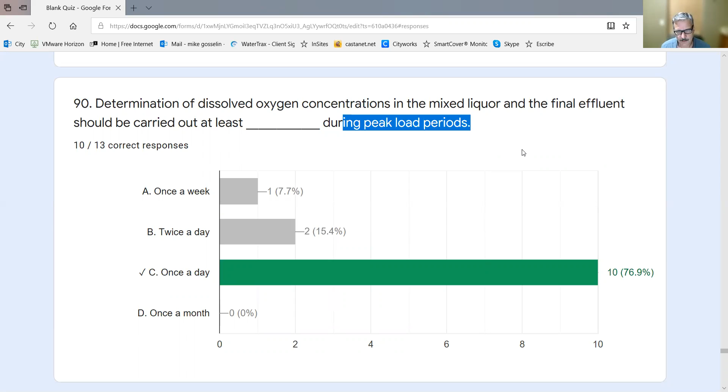Appreciable quantities of sludge burping to the surface of primary settling tanks may indicate. So let's just step through this one. Answer A, worms, that has nothing to do with the settling tank. Actually, you may see worms in secondary or sand filters more so than in a settling tank. Excessive sludge scraper speed, you wouldn't see the burping or septic sludge, because it would be moving so fast, it would just keep pushing the sludge to the hopper, so it would be removed. So that one wouldn't be the answer.

Grit chamber is not removing grit. Grit would be hopefully non-organic, so it wouldn't be directly related to septic sludge or burping. So the correct answer is D, sludge not being pumped in a significant quantity. So it's sitting in the tank too long, it's starting to go septic.

92, not supplying enough air will cause, yeah, so we'll step through this one as well. If you don't supply enough air, your effluent quality is definitely not going to improve. It's going to decrease because you're not providing the treatment required. Sorry, I dropped my pen. Excessive turbulence would not be there because you're not supplying enough air. And slick spots show up on compartment walkways. That wouldn't be the issue either. Walkways have nothing to do with the amount of air supplied.

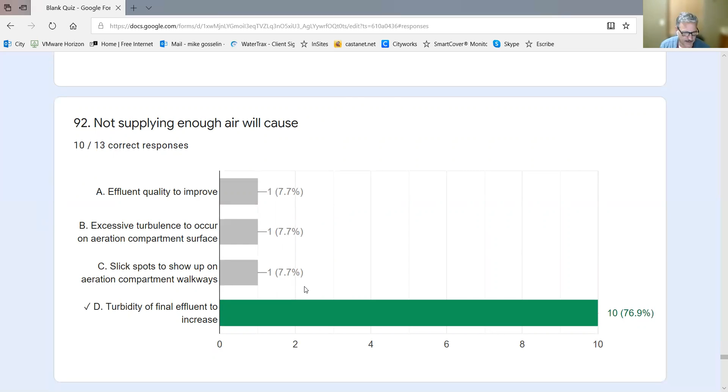So the correct answer is turbidity in final effluent increases. Basically, you're not providing the treatment that you need to, so you're having carryover into your secondary clarifiers, which is then more than likely going to make it through to your final effluent. The majority of people got that right.

Given the data below, what is the most likely cause of the extended aeration facility problem? DO level high, blower normal, wastewater characteristics normal, drop pipe air control valve open, surface turbulence high. So you're definitely going to see some of these scenario type questions on your exam. Someone mentioned that we want to do a few more scenario questions. I think we did some the last session we were together. So you just need to step through these things. Like 50% of the people got it right, which is great.

So the DO level is high. So let's just pause there for a minute. So we got too much air in the tank. Then we move to the next section. The blower is normal, so there's nothing wrong with the blower. It's not high temperature, it's not high vibration. So we've got too much air and the blower is running normally. Wastewater characteristics are normal, so there's no high loading, there's no issues there. And the drop pipe control valve is open and the surface turbulence is high.

So if you look at your answers, now, if you didn't have these answers in front of you, I would hope that you could go, there's definitely a problem with the drop pipe air control valve, right? But if we look at the answers provided, air relief valve stuck shut. So the air relief is what blows off excess air from the blower. None of our scenarios in that question talk about any high pressures, so we can get rid of that one. I'm going to skip B.

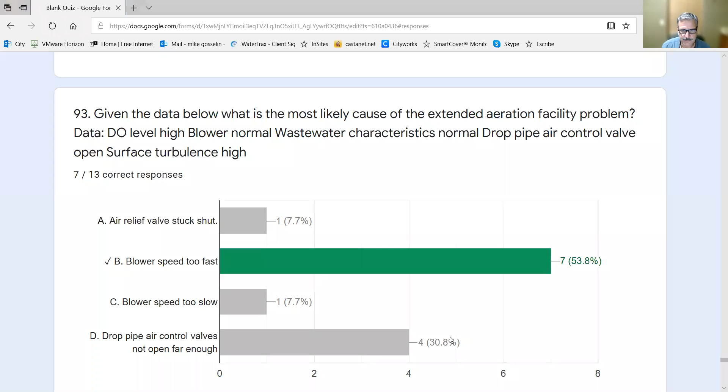Okay. The sludge depth in the secondary sedimentation tanks is too high. What will happen? The majority of people got this right. It's anything to do with sludge being kept too long. Depth is too high, so it's again being kept too long. There's too much in there. Everything relates to a potential septic situation. Okay.

What might cause white filamentous growth in an RBC system, which will result in poorer BOD removal? So not so much the pH. You want to stay away from the pH, whether it's an RBC system or any kind of aerobic system. White filamentous growth, definitely, some septic wastewater would cause part of that. Low BOD loading.

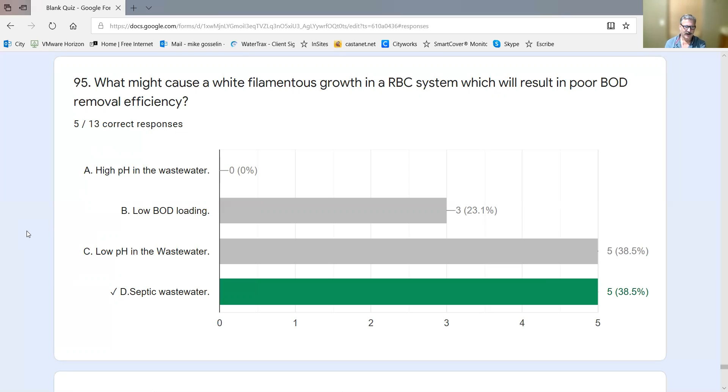Low BOD, you might see some white crisp foam, but it's talking about filamentous bacteria here, so you have to default to the septic wastewater. That's kind of a tricky question, that one, depending on what you read there. But okay.

Pump station maintenance reports, all of the above. Okay, so any special equipment required. If you're heading out there, you want to know what you have to take with you. Repairs that were made, additional maintenance required. So definitely D, all of the above. Excuse me. 97, everybody got that right. So it's awesome.

Every day, the operator of a small wastewater plant should determine all the plant equipment is operational. For the ones that chose answer A, cleaning settling basins, disposing of sludge may be part of your duties, and in larger facilities, many operators are working in a section of that facility on each day. So you might be in dewatering or you might be in secondary, but the question is small wastewater plants. And so in a small plant, an operator definitely has to make sure that all the equipment is operational.

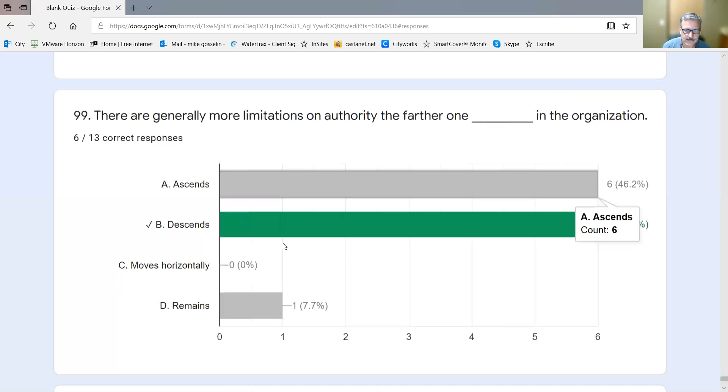There are generally more limitations on authority the farther one blank in the organization: descends. Yeah, so as you go down the ranks, there's more limitations. So what you have authority to buy or spend or sign for or do your job, assign tasks, however it is, whatever limitations are put on a person, depending on who they work for. But as you descend, you have more limitations. Hopefully the explanation helped with that one a bit, and there'll be questions similar to that on the exam too.

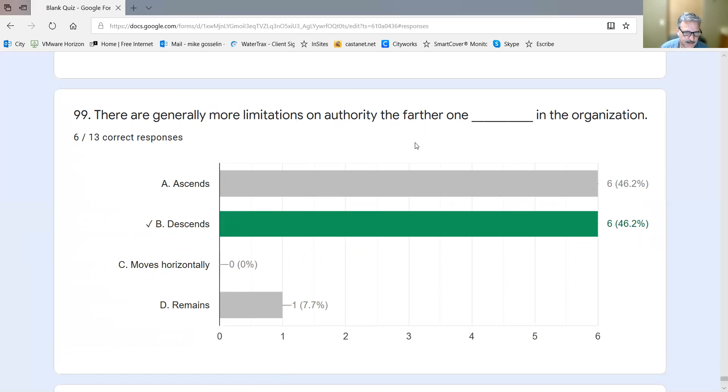So think about that. When an employee breaks the rules and requires discipline, who's generally responsible for administering it? The correct answer there is supervisor. You may have HR involved, you may have upper management involved, depending on the level of discipline, but the direct supervisor administers the day-to-day operation of the facility and deals with staffing that's there as well. So it's the supervisor at the end of the day.

So that's the last of the questions that we went through. Like I said, for those that passed initially, congratulations. There's a bulk of people that were very, very close, and I'm hoping that stepping through these questions today provided some clarification. This is not a copy of the exam you're going to write, but it's a really good indication of the types of questions, how the questions are worded. You're in a timed setting, so it's close to what you're going to experience. The wording in the questions, they're from ABC and not from Canada, so wording might be a little bit different. Just remember to slow down and really understand those questions as best you can.